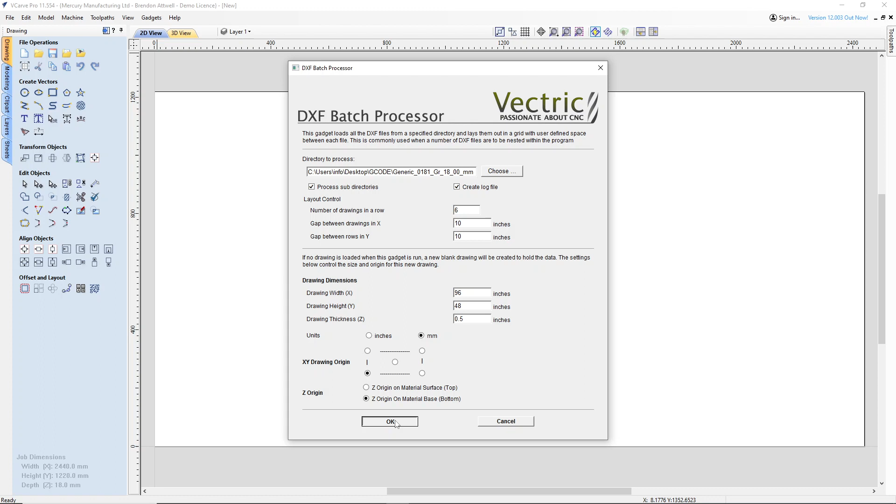So that'll be our clearance around each part when it comes in. The drawing thickness, don't worry about that. We're going to be using millimeters, bottom left for the drawing, and Z origin on the material base. So we click OK, and that should bring it in after a few seconds.

There you are, there's our drawings in. But at the moment it's one big block. These are all the parts. So what we're going to do is select them all, so we highlight the whole lot. You see I drew a box around it. Okay, we got the whole lot.

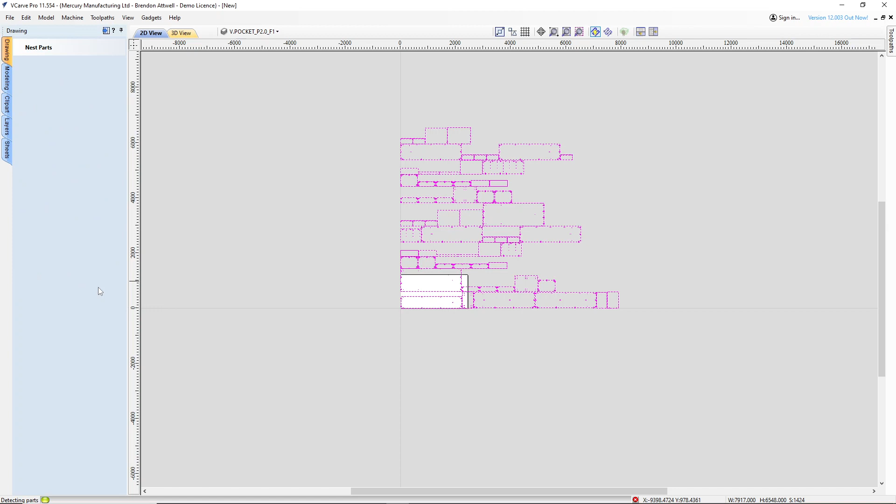And now I'm going to click the Nest button, which is over here, and the Offset and Layout Nest. This should nest it all onto sheets for me.

Alright, so we got to put in our tool diameter, which is 8. I'm going to use a clearance of 2mm in between each one, and a border gap around the outside of the board. I don't want to start anywhere nearer the edge than 5mm. I could change that to 10mm. In fact, I will, I'm going to change that to 10mm, so that we make sure we cut off the rubbish off the edge of the board.

We don't want to rotate the parts because it's a cabinet, and we could be using a grain material like an oak MDF or something. We want the grain to be running long ways in the parts, so we're not going to allow rotate. We're not going to allow mirror or allow parts inside other parts. We're going to be going from the bottom left in a nest direction along X, which is left to right.

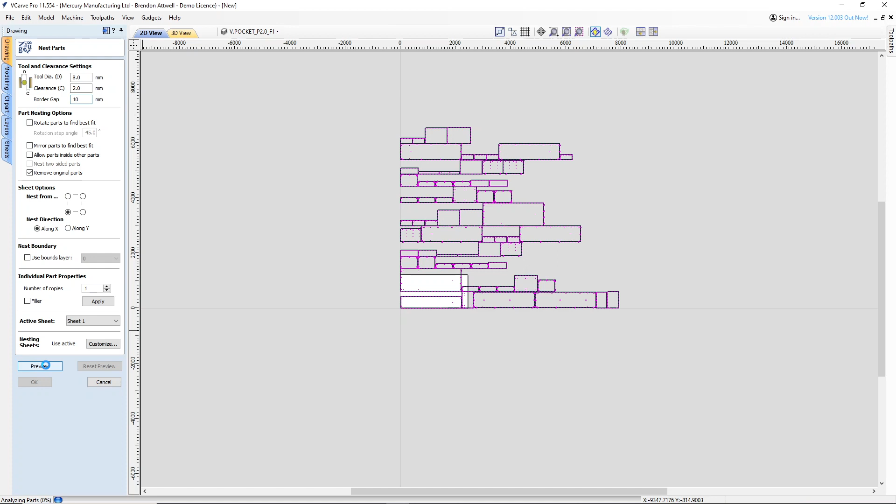We're going to have one copy, and what we're going to do is just use preview, use the active sheets, and we're going to preview it. This should be where it's going to throw everything out onto sheets for us.

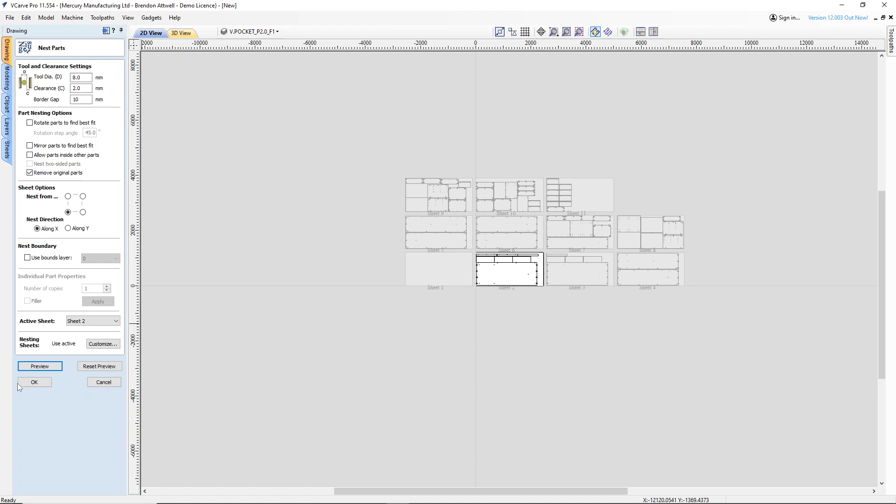There we go, we have 11 sheets. It's actually 10 sheets because the first sheet is blank. But that's okay, that looks good to me. We've got all our parts imported. So we press OK.

So that actually gives us everything, and it shows us the sheets. And if we look at our layers list here, this gives us all the different layers that have cut out of Polyboard. Okay, anything in here with a little squiggle in it has got data on it. So every one of those down there has got data, but layer 1 and 0 don't have data, so we can actually turn those off.

We don't need those. Alright, but we could actually delete those layers, there's nothing on them. But we'll leave it at that for the moment.

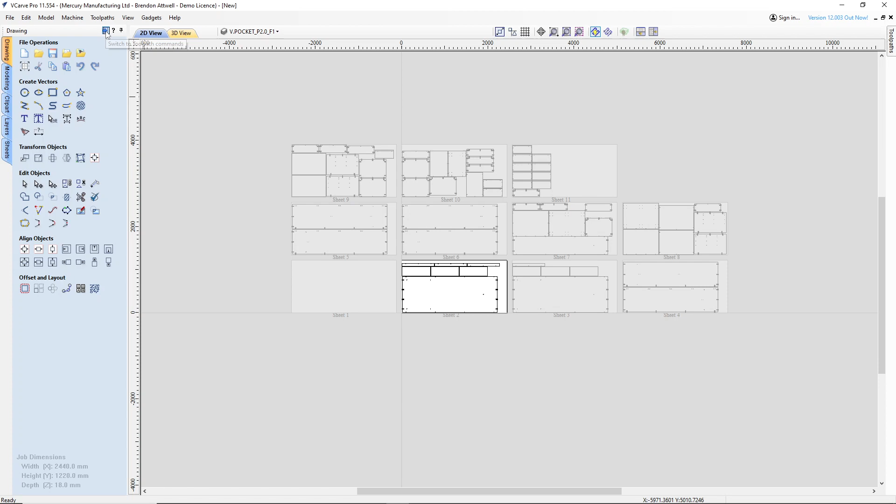Okay, so now what we can do, if we want to automatically toolpath this, which is something I'm going to show you how to set up in a different job, or even show you in your training. It's quite a complex little setup to do, but what we can do is import a toolpath template. So I'm going to use this one here, load toolpath template. This is to bring in one I've already made up, which will work for this job.

Okay, I'm going to use the Mercury import toolpath template. Do I want to apply it to all sheets? If I say no, it'll only apply it to this sheet. If I apply it to all sheets, it'll apply the whole template to everything.

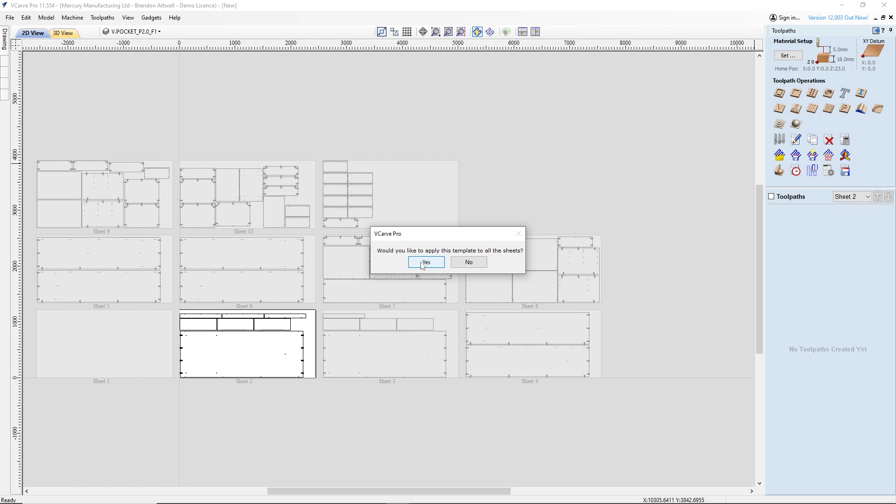You'll see on the right hand side now it'll start creating the sheets and going through the toolpath to see which part of the toolpaths are actually active on each sheet. We've got lots of different layers - each toolpath is associated to a layer, and it's checking each sheet for what's actually active. If I zoom in, you'll see bits of it going pink as it finds them, if the recording comes out clear enough.

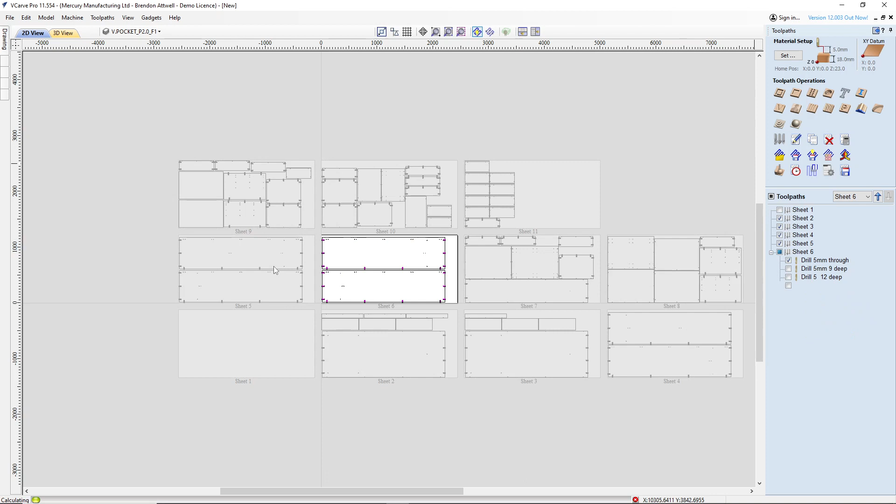So we wait for it to do this, and then we'll pick a sheet and preview it, and you'll be able to see that everything's been automatically toolpathed, and how quick it is for the whole lot. This takes about 30 seconds on this program. The new version, version 12, seems to take ages, so that's why I'm demoing in 11.5.

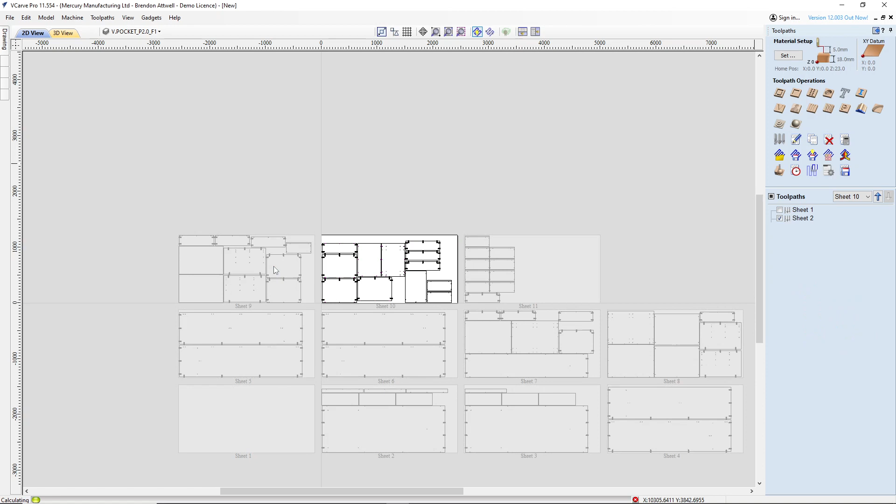So just let this crack on - let's finish sheet 8, now doing sheet 9, sheet 10. Oh, sheet 10 looks like a good one to demo. That's the one we'll select in a second.

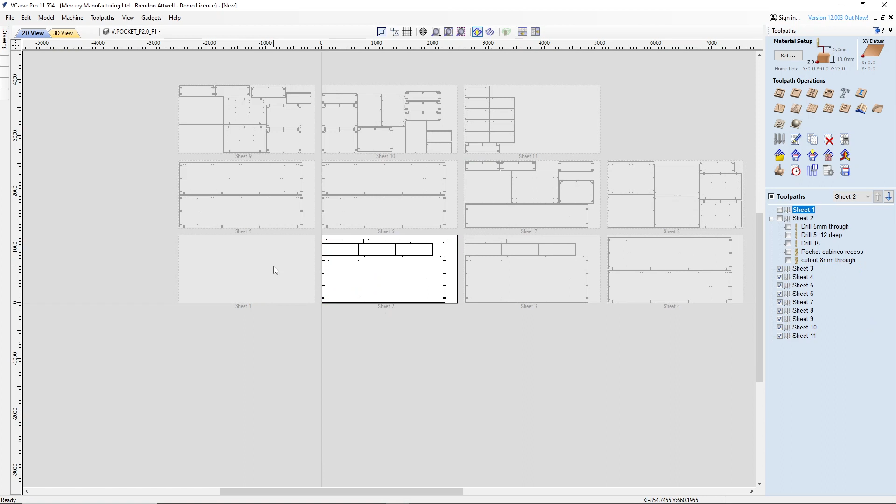Okay, so it's calculated all our sheets, let's go to sheet 10. So if we go drawing, modeling, clip art, there's sheets here. If we select 10, it should flick to sheet 10. Alright, so that's how we get to sheet 10.

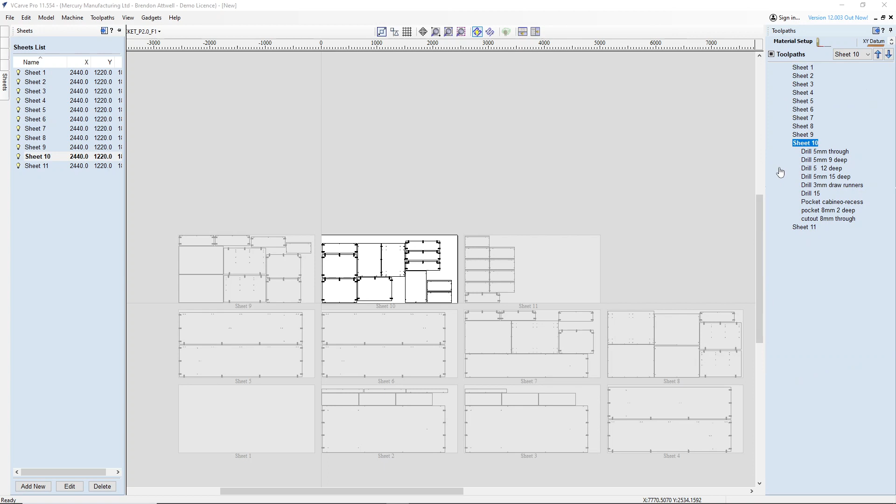Now what we can do is preview what is on there. So we press the preview button and it'll bring up the 3D space for us. I'm going to put it at a slight angle - I press the X, Y, Z button there, which puts it in ISO, which gives a better view of what it's going to do. I'm going to turn the speed down a little, otherwise it'll do it instantly. I'm not going to draw the tool, just animate the preview, and preview visible toolpaths.

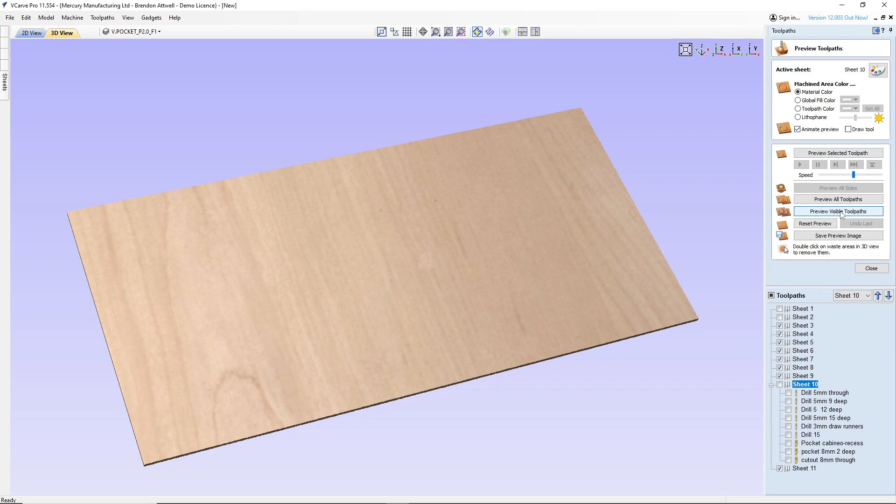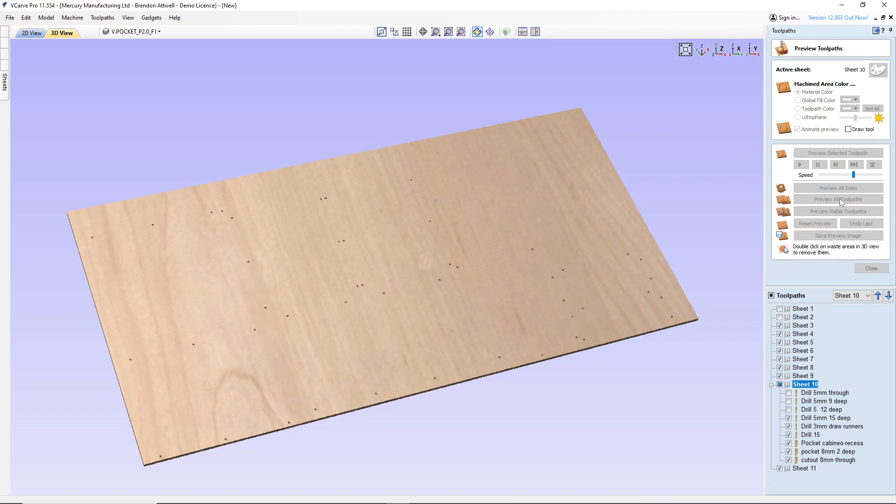Okay, let's have a look - sheet 10, there we go. Let's turn those off, and preview all toolpaths. This is sheet 10, so we can see loads of drill holes going in, loads of cabineos going in, cabineo recesses, and then it'll finally do the cutouts. It's doing some pockets for the backs, and now it's doing the cutouts.

Now I haven't selected the cut order properly, but the way I've done that there, most of that will come out alright. The cut order needs to be changed actually - I will change that in the template. It should really be from the top right downwards, just so everything is given the maximum vacuum.

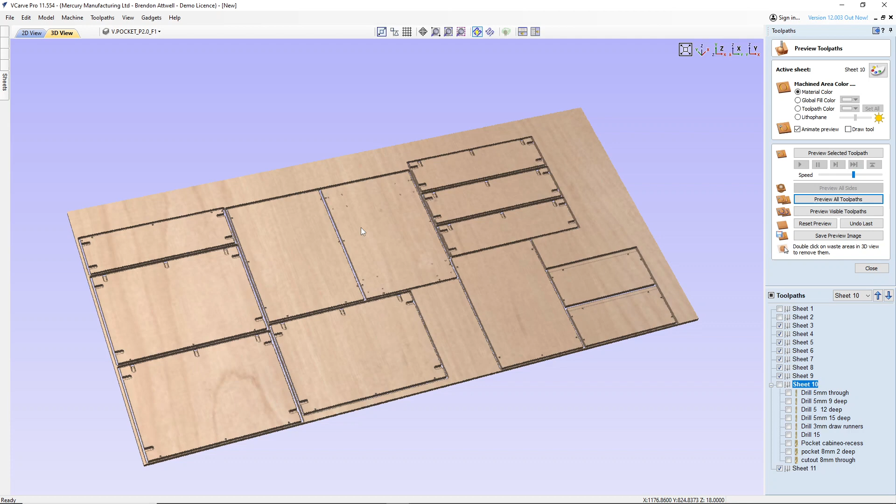But as you can see, we've just brought in a massive job - this is a wardrobe job of 11 sheets, automatically toolpathed. If I delete the waste, you'll see the parts - that's the parts we actually got on that sheet ready to cut. You can see the cabineos - cabineos recessed, drill holes, base holes, etc. Everything's in there. We've got some rebates.

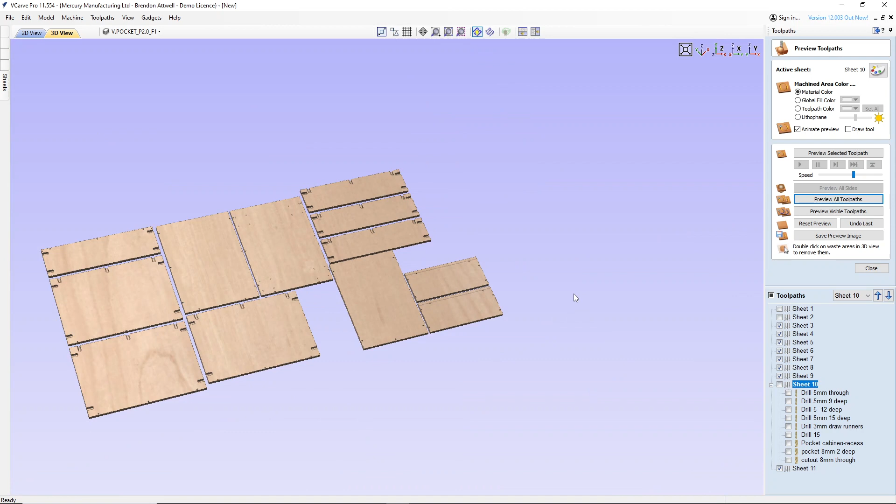Let's have a look, let me just move that across with the control button. We have rebates. Anyway, that's how you do it. Then all you have to do is click sheet 10 - let's turn the toolpaths off a second for everything else. Okay, so I click that button twice, turns all the toolpaths off.

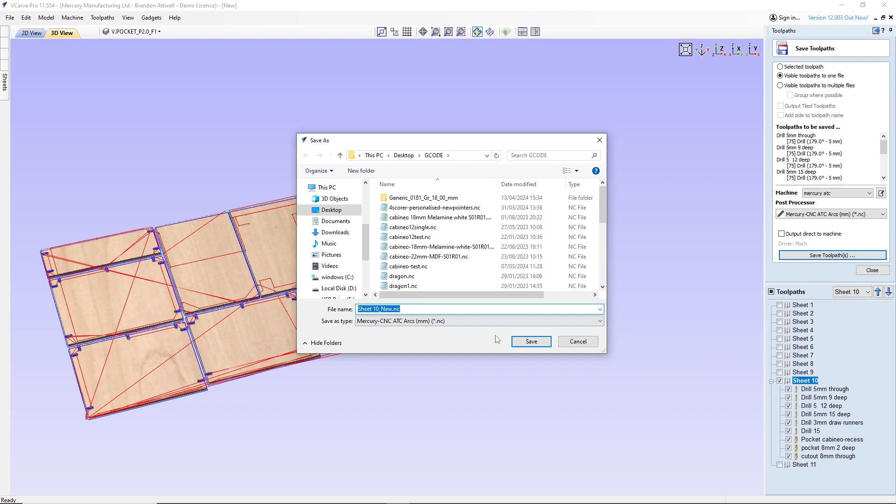If I click sheet 10, I can now save the toolpaths for sheet 10 and save it straight to our machine. Okay, so here comes the code - sheet 10 new, okay, and save.

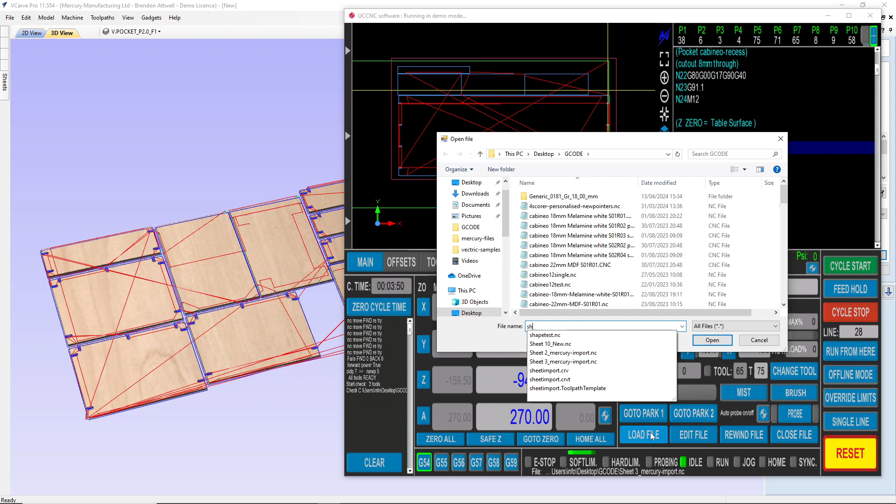So now we could go into our main control program. We can load the file - I've got it just minimized at the moment. We can load sheet 10 - type in sheet 10 new and open.

And there's our job. So what you see on the left hand side is what we're going to cut here. Okay, cool, thanks for watching.